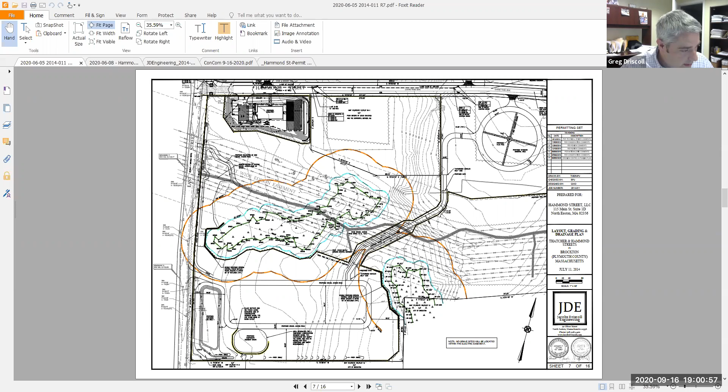With this set of plans, since we applied for the SWPPP with EPA, we added temporary sediment basins into the erosion controls, stockpile areas, concrete washout and dewatering areas, and additional rows of erosion controls in sensitive areas.

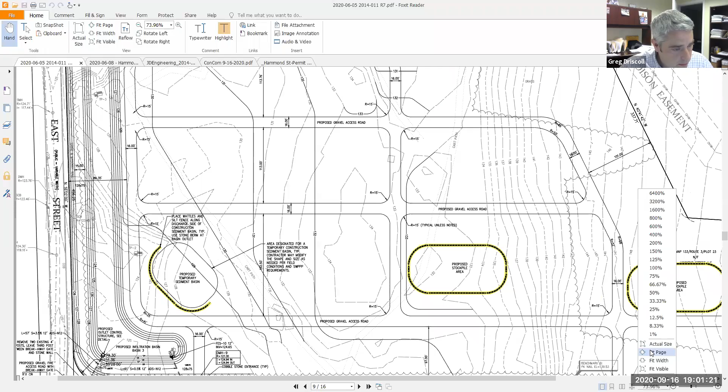A few modifications we made for the SWPPP are now shown on this plan. So that's pretty much what we're asking for, is just to amend the order to revise the phasing. The applicant would like to bring in the tree company, clear the area, and start grading and improvements on the road and access throughout the area.

Okay Megan, do you want to go over your comments? Sure. So I went out to the site to do an update on the existing site conditions and check the wetland flags, since it's been over 3 years since this was originally permitted. Generally, for the most part, I was able to identify most of the flags and they appear to be generally accurate. The only comments I had were regarding wetland A, the northernmost wetland.

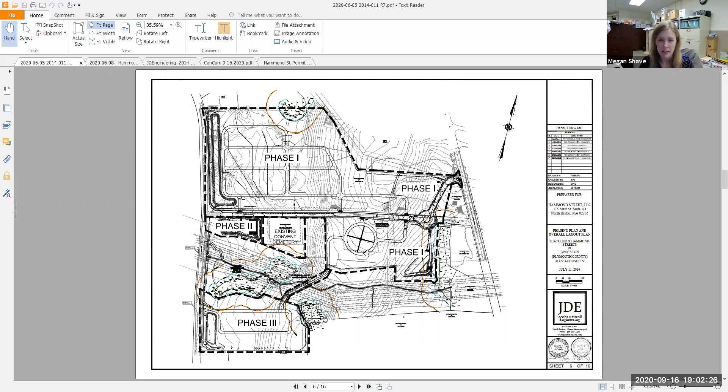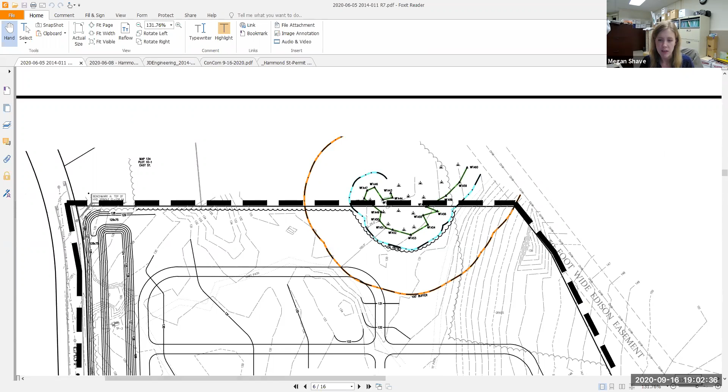I was unable to locate wetland flag A56, which is on the right side of the wetland and is also the one that projects farthest out. Because I was unable to locate that flag, there was a concern about how that would affect the limit of work as it appears to be currently staked. Similarly, the abutting flags, around 54 to 51, appeared to my eyes to possibly be a few feet off based on the topography of the site.

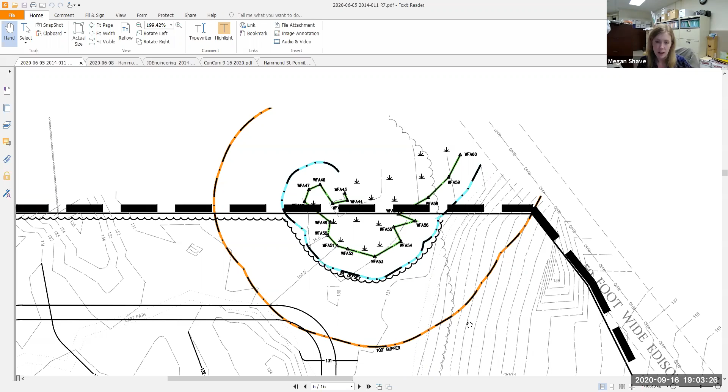My only other comments were on wetland system C, the easternmost wetland, a wet meadow that transitions to a scrub swamp. Those flags are currently mounted on stakes. Greg, can you scroll down to that? Yes, right there - those flags are mounted on stakes because it starts off as more of a wet meadow BVW. I was able to locate almost all of them, but in the area particularly around the easement, some of them I was not able to locate.

Taking all that together, I would recommend that any amendment include a special condition, a new pre-construction special condition, stating that as part of the pre-construction process we do another inspection of the limit of work. It looks like the limit of work has already been staked out, so I'd recommend we check that again before pre-construction goes ahead with any clearing.

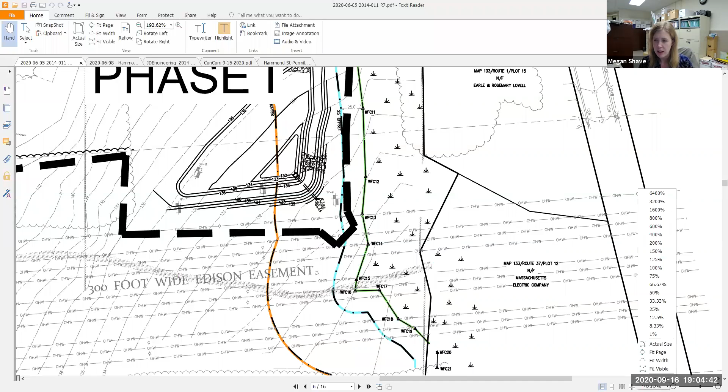That's my comments on the wetland areas and limits of work. In terms of the proposed amendments, the overall scope and extent of the project has not changed, so I think considering it as an amendment is the appropriate way forward. Overall, moving the area of phase 2 in the north to phase 1 is adding a substantial amount of concurrent clearing with the existing phase 1. However, only a small proportion of that clearing is within the 100-foot buffer zone to wetland A.

So this is something to consider - it's a substantial amount of concurrent clearing, but it's mostly upland. My second comment relates to the proposal of moving - there's currently special condition D4, stating that the access road to phase 3 should be constructed as part of phase 1, in order to prevent inundation to wetland series B, just to the north of it. I believe the amendment request is asking to move that access road out of phase 1. Based on my review of the previous reports and the reasoning for that access road, I don't think there's been a sufficient rebuttal of the need for it.

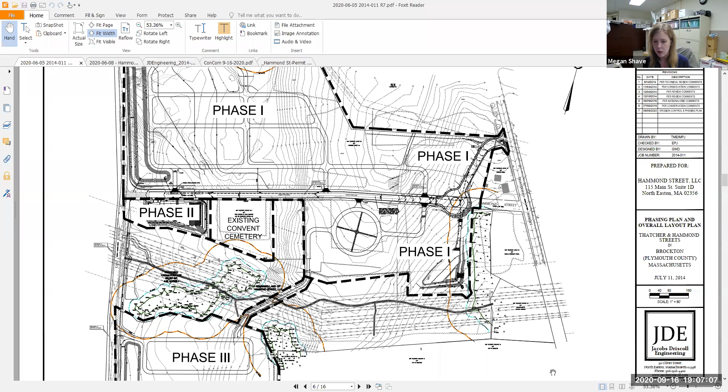Okay, thank you. I was on the board when this project was approved. I walked the site with Mr. Driscoll and Mr. King, as well as other members of the commission and people from Nova Armstrong.

The reason for the phasing, and the order of conditions, states that each phase must be completed before another phase is done. In my recollection, what we were seeking was that a phase be completed and that the plots be filled before another section was cleared and prepared for burials.

So it sounds like, for convenience, the developer who agreed with this wants to go in and clear cut everything. When we walked the site, we also talked about not clearing every tree, working within the topography and the landscape. That wasn't necessarily part of the order of conditions, but the order of conditions does talk about retaining trees and every care being taken to protect and keep trees located within the 100-foot buffer zone.

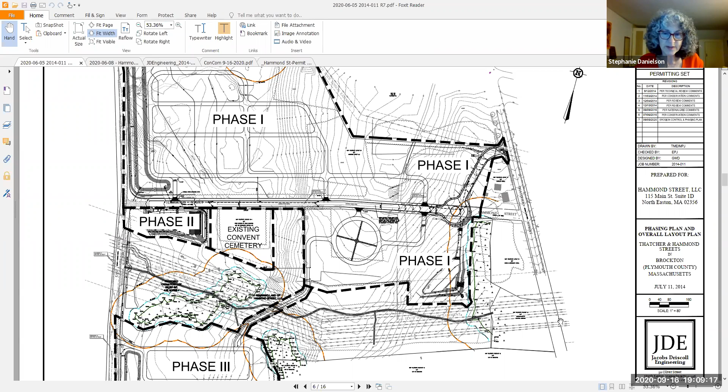I want to say that the reason for discontinuing Hammond Street, and I may have this wrong, it may have been a convenience for operations of the cemetery. I know there was some concern from abutters about the potential traffic impact onto the adjoining streets. Maybe Mr. Driscoll will recall that and can talk to it.

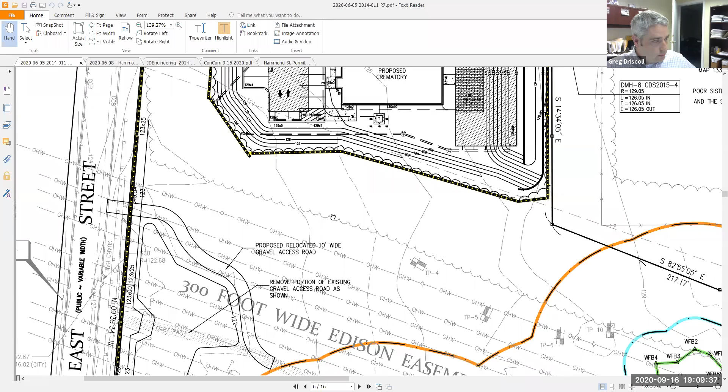Yeah, as far as the concerns about the traffic implications, this was never meant to cut all the way through. We ended the pavement of the street right here, and there are gates proposed to keep that from happening. So that's one of the things we went through back when we first permitted it.

We also came to agreements with Mr. Lovell and the Sisters of Jesus Crucified to relocate the entranceway around Mr. Lovell's property instead of going straight out through the previous Hammond Street section here. This has since been discontinued through a process with the selectmen or the city council. There was quite a bit of back and forth with the abutters and appeasing everything they would like, and we did land swaps and everything to make all this happen.

And as far as the traffic goes, this won't be a throughway. There's no direct connection out to East Street.

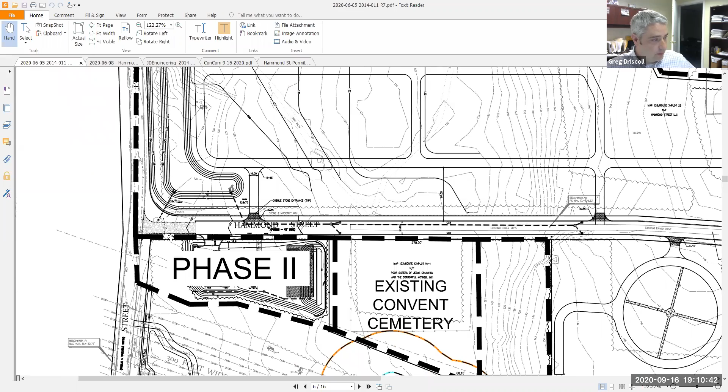So Mr. Lovell feels it's more advantageous to have that roadway run along the back of his property in a roundabout way. I believe he's since passed, but his brother lived on this property here too. They didn't want to have a road in between their properties, since these two were related at the time.

I just don't see where that's advantageous. Yeah, they didn't want a road cut in between their two properties, and they're related. They also, I think, there's this other house - this is the amended plan.

Yeah, this was all in the original plan. This was from 2016, I believe, when we did all this.

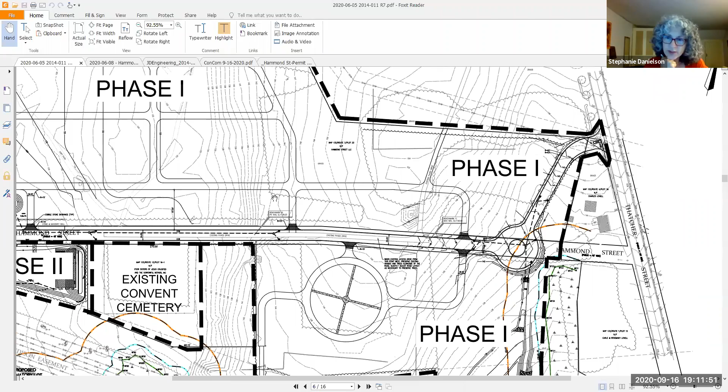And any response to my comments about why the phase? I'm not inclined to vote to amend the phasing for the reason that I stated in the original intent.

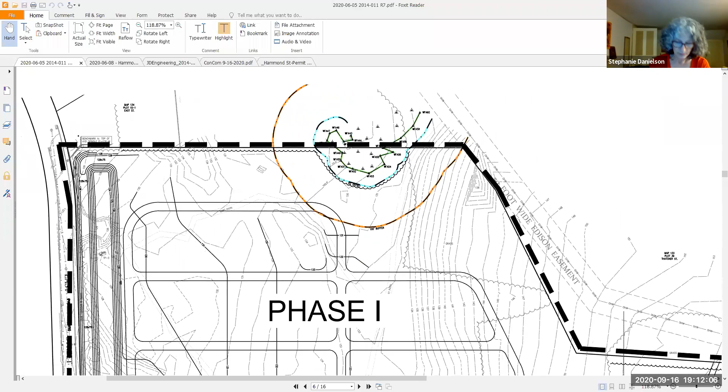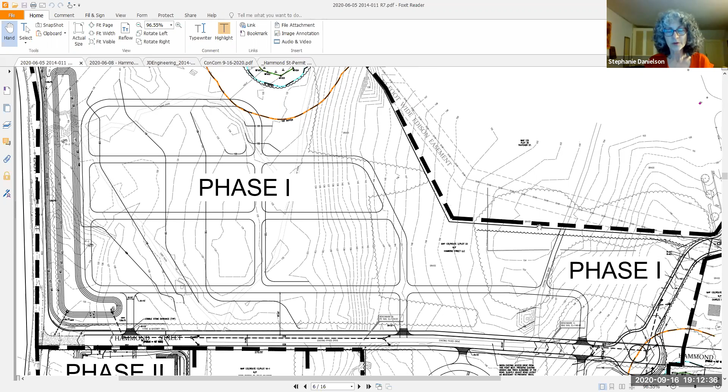Well, we could get creative here and introduce another portion of the phasing of the work, and cut out the area that's within the 100 feet of this wetland, if that's the concern, and work just in the upland areas. Well, no, the concern was that the purpose of the phasing was to have an area cleared and prepared for use for burials, and then to use that area and then move on to the next area, and the next area.

Doug's not here tonight, I was going to ask him. I just know that they would like to move forward with the majority of the project at this time.

Jim, do you have any input? I think the bottom line, Madam Chairman, is that from a construction perspective it was impractical to go ahead and utilize the prior phasing plan, because they seemed inconsistent in how they were going to approach the development of the property. Essentially, where the phase is now, you've got most of your construction going on the northerly portion of the property in terms of opening it up for cemetery use.

It's not going to be, quote, clear cut and left clear cut. The development will proceed on a very timely basis in terms of creating a project they can develop. It's an engineering perspective that Mr. Driscoll can identify, but I recall sitting down with the developer, and when he looked at the specifics and the timing, he found it was absolutely impractical to proceed.

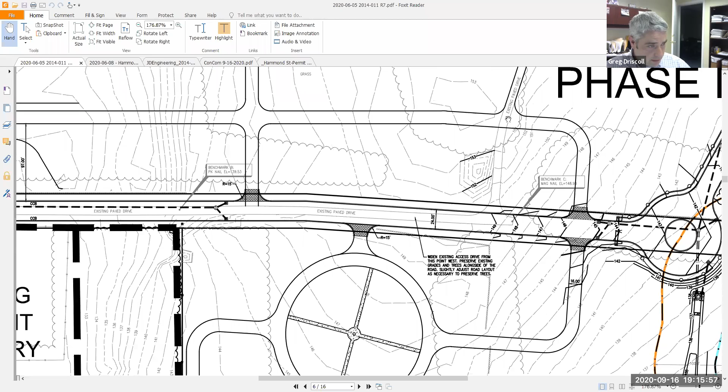There is a portion of the road along here where you'll see it's essentially a paper street, but there is this roadway right here that the sisters had built to access their cemetery. Okay, right here, so you see how it ends right there. Gotcha.

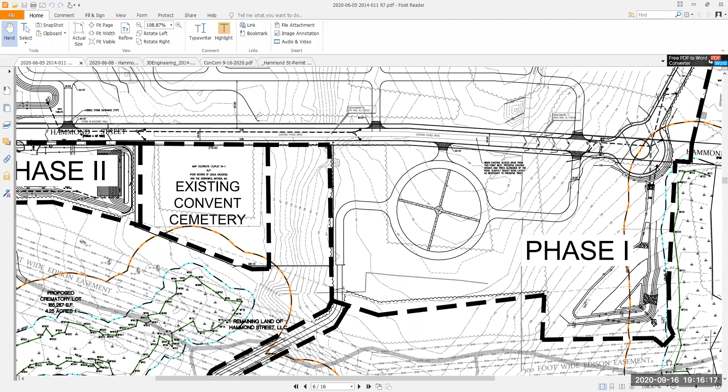So when you were explaining earlier why the road with the roundabout went off to the north, that bit of Hammond Street doesn't exist, so the two lots are literally right next to each other? I know it's discontinued, I'm not sure if they annexed those into their properties yet. Ah, okay, gotcha.

And could you just once again clarify this phasing? So I think what I'm hearing is that from a construction point of view, it makes sense to do everything together instead of the way it had been proposed to be phased before.

But in terms of use of this cemetery, which part is going to be used for burials to begin with? Is that the part near the roundabout, that northeastern part? Not really sure, I don't know if they're going to go from one end to the other, or if they'll just have lots and let families choose anywhere within there. From anywhere? I'm not sure. I know this area here is designated for veterans.

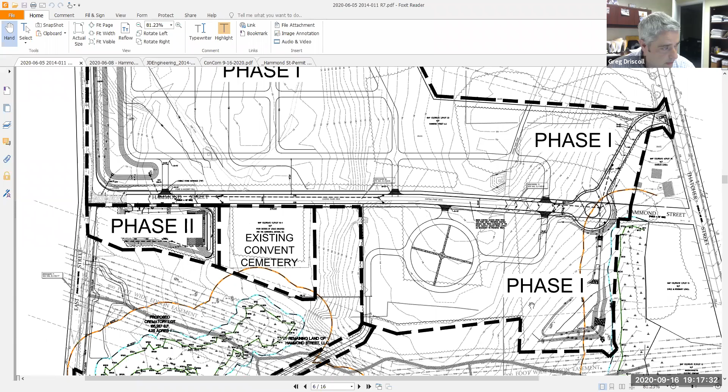And that's something I wanted to get going. Okay. And Stephanie, was it the intention before to delay clearing until it's actually needed? Right, so my second question was going to be, well, how long is it going to take if the northeastern part of the cemetery is going to be filled first? How long would it take to move into that northwestern side? But I don't think you can answer that.

But that's kind of information that I think would help me make a decision on this project, because if it is the case that they're going to start offering lots only in the northeastern section, and it takes, I don't know, three years to fill those lots before moving into the northwestern section, then my feeling would be to not clear cut that section for as long as possible until it's absolutely necessary. So that's kind of my comment and where I'm sitting right now.

My only other question, and this was sort of approved before so I don't mean to reopen the conversation, but I'm curious: the roundabout comes very close to the 25-foot buffer line, and I would have liked to have seen it moved further away. But it is what it is, so I'm just mentioning that.

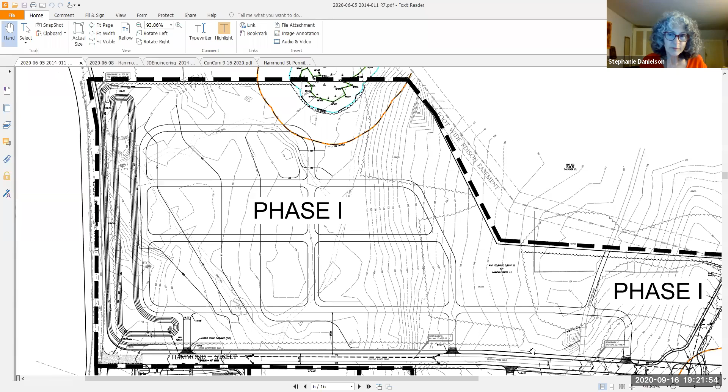Greg, when was this permitted? That's another good question. Is this permit still valid? It was permitted in 2016.

We have an extension. So you did seek an extension? Yeah, we have an extension until this January. So that was another question I had—if the work is underway by January 8th, when this expires, are we still good to continue, or do we need another extension?

Oh, no, you need an extension, and you keep needing to extend until you finish. You need your extension submitted to the commission at least 30 days before the expiration. Once it expires, if the number of days before its expiration date is less than 30 days, and once it expires, you can't request an extension—it's a new filing.

So you want to make sure your client is on top of that, which they usually are very on top of.

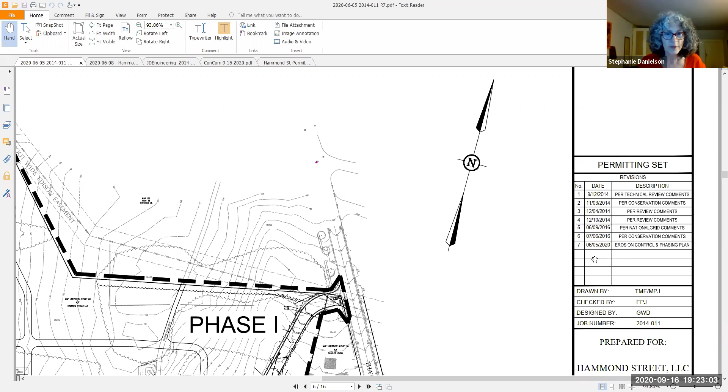I keep wanting to move this. Can you scroll this back down so we can see more of the area?

I can have a letter for the extension submitted between now and the next meeting, if that's helpful.

So Joanne, to answer your question, it was to try to preserve—in part because so many cemeteries really are just flat areas with minimal vegetation, minimal woody vegetation, and yet some of the more restful and pastoral cemeteries incorporate trees along the pathways, providing an area where people can go and really appreciate the environment while considering their loved one who is no longer with them.

This is Sparks. I'd very much like to echo that—personally, as a landscape designer, this is a thing that I do. Following what Joanne said, if we can have a better idea of the layout of the land, we can make much better decisions to everyone's benefit here. It goes beyond our scope of the wetlands, but I feel compelled to help make this a better, more successful project that also helps the land be better.

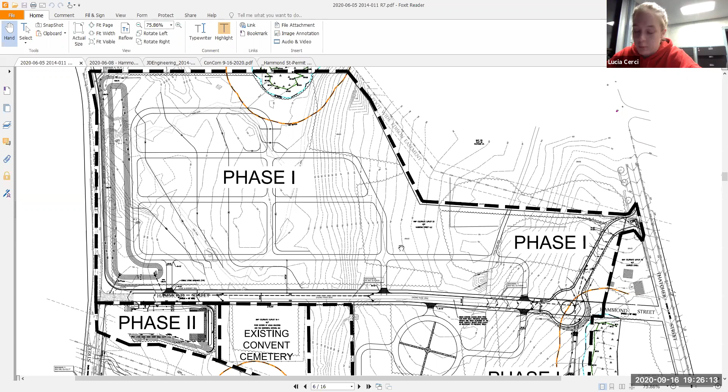Do I have a motion to continue to October? I'll make a motion to continue to October. Do I have a second? Second. All in favor? Zygmunt, aye. Cerci, Danielson, aye. Cerci, aye. Sparks, aye. Motion passes, and we'll see you next month.

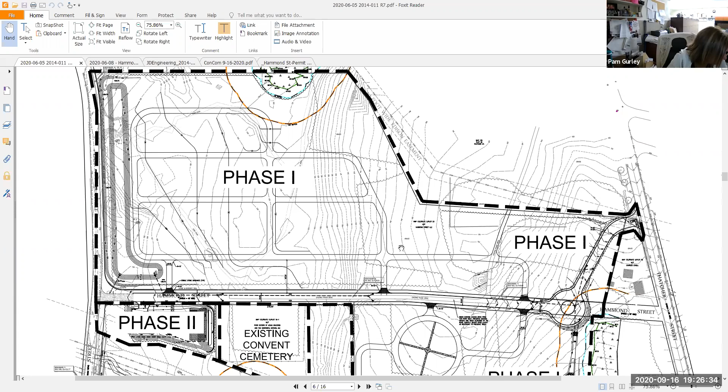Okay, do you have a date for the next meeting? Thank you for your time. Pam, what's the date? The 21st. Did you say the 21st? No, it can't be the 21st. Is it? It is the 21st, October. Okay, October 21st. Thank you, have a good night.